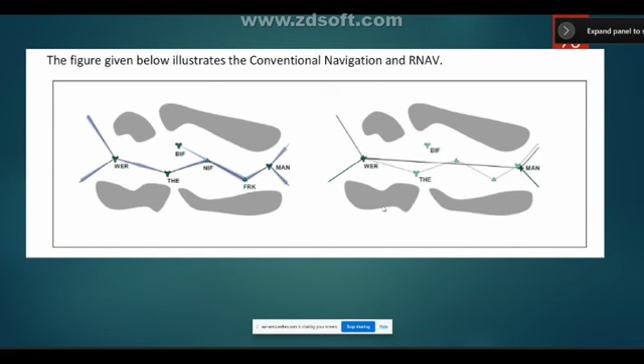So slowly you can find almost all our aircraft, mostly in en route airspace, will fly this way using RNAV, area navigation, instead of using ground based navigational equipment facilities, or global positioning system GPS, or in generic term GNSS, global navigation satellite system. This is the way in which it is defined.

Conventional routes, you can find the first left one, ground based, zigzagging, but ultimately you will find that has only limited flexibility. Whereas in RNAV routes, the routes are defined using waypoints. You can see this symbol represents waypoints. So it will fly from waypoint 1 to waypoint 2, waypoint 3, waypoint 4, and ultimately reach the destination.

At least for the participants, this slightly deviates from our technical subject, but having given this attachment, we should know slightly about other things also, like RNAV, RNP and all when we study navigation aids. So first it was having only limited flexibility, and migrating to RNAV increased efficiency, and it is highly optimized.

By this, again, what do we achieve? Again, as we said earlier, reduce the time, fuel saving, and carbon emission. Other than that, is anything there? Can anybody guess? The deviation from the desired path is reduced.

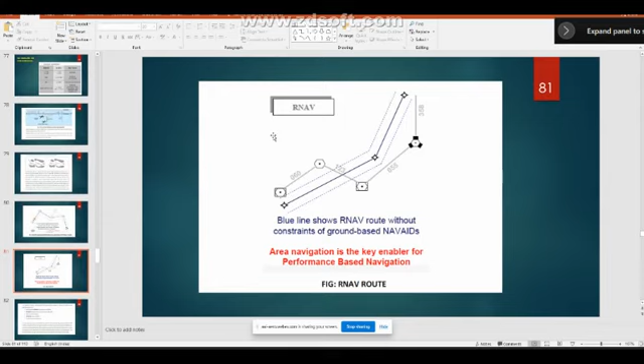Can anybody say? TSE - TSE is one term. This is called total system error. Total system error, okay.

Exactly right, you are absolutely right. The system error is going to be there. System error in DME - is there any system error? In VOR, is there any system error? In DME yes, sir. For DME, 370 meters, something plus or minus 1.25%. Yeah, that's why in Annex 10 we have studied the technical specification.

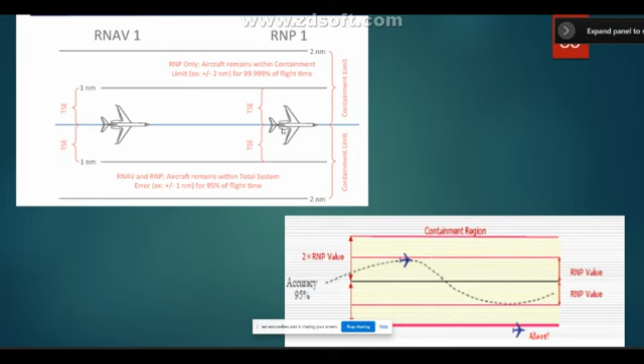All of this is available in the Performance Based Navigation Manual, Doc 9613. Anybody interested, you can go through it - clearly given in Doc 9613. Though we don't require it now, out of interest, in future it will be something like this, so naturally you have to learn, you can read. Are you getting me?

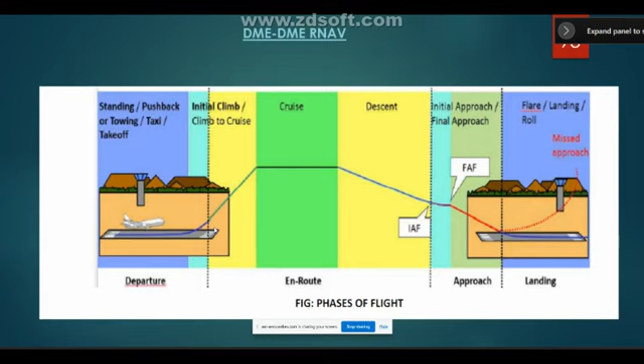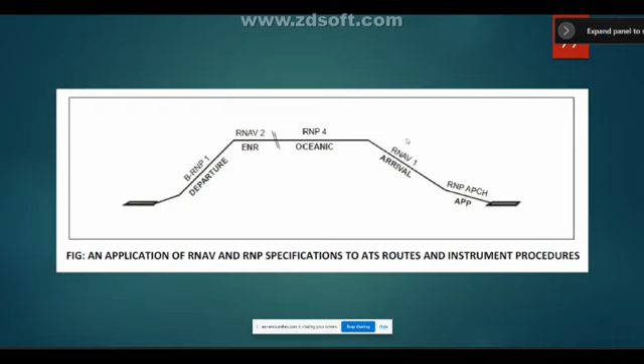So you can find this airspace consists of a lot of airways and a lot of waypoints. Based on that, any flight flies through the waypoint airspace from departure to arrival. Just for an example, RNAV5 - how is it defined? Accuracy plus or minus 5 miles for 95% of the flight time, that's how it is.

Integrity, anybody remember what is integrity? Sir, integrity means faithfulness, how much time it will give the same reading again and again. Integrity, the faithfulness, repeated performance. Added to that, faithful.

It doesn't stop with that integrity. Faithfulness, okay. If I miss faithfulness, what happens? If my equipment is not faithful enough, what happens? Sir, it should not provide misguiding information. That's what we have just read in VOR.

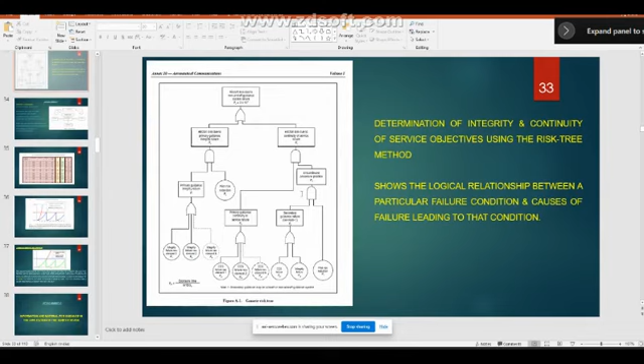During VOR we were going through all those things. No equipment should give misleading information. As far as normal operation is there, it's fine, good. My system giving false alarm, yes, good. But my system never should give misleading information. That is why integrity. If integrity is there, integrity risk also is going to be there.

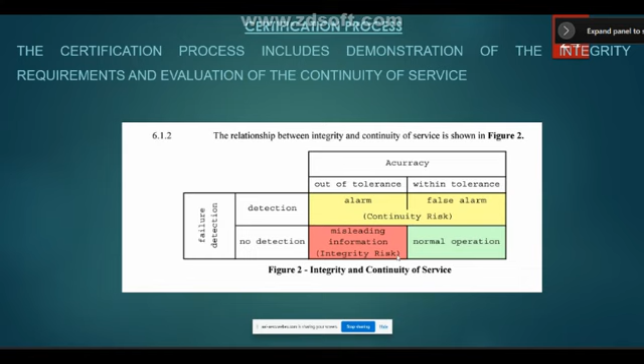That's why in our DVOR class we have seen integrity and continuity of service. No time misleading information should be given. Normal operation fine, alarm operation is fine, my system shuts down. But even after alarm my system is not shutting down means that is dangerous. That should never be allowed. That's what we were studying in VOR.

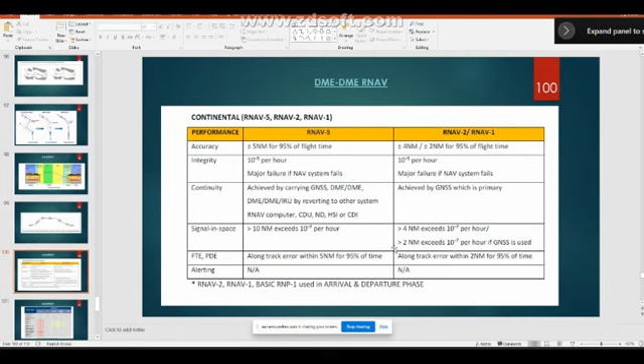Now integrity, this is what just we were seeing. So 10 to the power minus something, per hour only this much can be for RNAV 5. If RNAV 5 can be used, by which facility can it be provided? Either GNSS, Global Navigation Satellite System, or it can be given by DME and DME.

RNAV means there will be two DME facilities, not only a single DME facility for aircraft flying. If we speak of RNAV DME, two adjacent DME facilities will be used for flying. DME and IRU, IRU is Inertial Reference Unit. Suppose GNSS fails, airborne equipment can use DME. If DME also fails, it can use IRU, Inertial Reference Unit, which is within the aircraft itself. So with a lot of safety everything is designed.

GNSS is the primary source for providing navigation signal. Secondary is DME with IRU. But these are all the facilities, the RNAV computer is nothing but an FMS which is available on board.

These are all the devices given to the pilot. CDU is the control unit, navigation display. HSI and CDI you should be knowing. What is HSI or CDI? What is HSI?

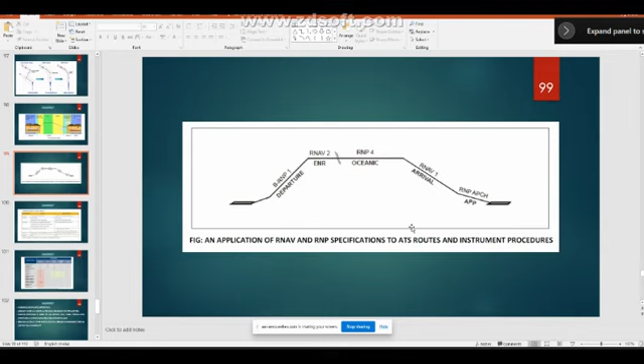Flight phases, do you remember this? From departure to landing, GNSS supports navigation. It provides navigation support, or it can be used as a navigation source.

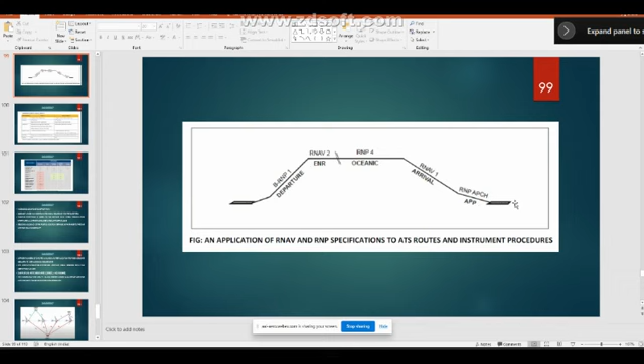It may be bit new, so you may not be able to get it fully, but still you can grasp it, because we know what is DME, what is VOR, what is GNSS, at least you can grasp it.

Now coming to this portion, DME to DME RNAV, increasing use of DME to support RNAV. Earlier in conventional navigation, aircraft used to fly in segments towards one VOR DME, next VOR DME, third VOR DME, like that it goes. But nowadays it doesn't fly like this, it takes a much shorter path.

So it uses DME and does not impose any additional technical requirement on the DME system. Simply by using RNAV, you need not upgrade your DME and all. Whatever DME infrastructure is there, that is more than sufficient to design RNAV routes.

Number 3, DME to DME positioning is based on the aircraft RNAV system that uses a triangulation method for position determination from multiple DME ranges. You see, multiple DME ranges.

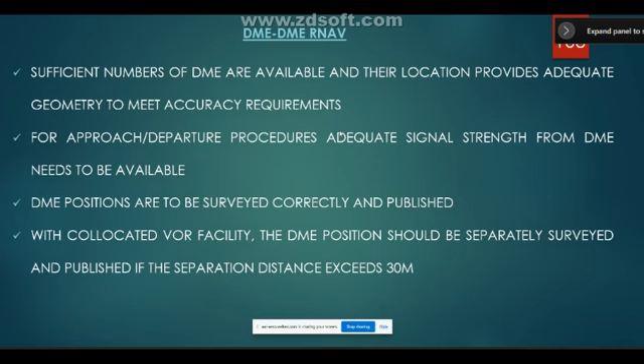With a co-located VOR facility, the DME position should be separately surveyed and published if the separation distance exceeds 30 meters. In some cases, and in most cases, it is co-located with DME and within 30 meters only, so the DME and VOR position will be the same. So these are all the points which are given in the attachment for DME, DME routes.

This is the way in which DME will be used. Both two DMEs will be used by any aircraft flying. Earlier, what we have seen, an aircraft will be flying this way, number 2, number 3, and it reaches destination. But nowadays it doesn't go like that, it goes in a straight path. It uses two DME, DME A and DME B.

So this is range A, range B. It finds the position, it flies at each and every point. It checks, FMS checks, and when it flies, it takes from this DME. When it moves apart, no more this DME will be used, this DME is being used along with this DME. Likewise, an aircraft flies through different waypoints using DME infrastructure, DME A, DME B, and DME C.

So that is called DME-DME RNAV. This is RNAV route, it can be RNAV 5, RNAV 2, RNAV 1, depending upon the airspace. And as we earlier seen, the accuracy of this is a must. DME equipment is a must. It's not only for DME, for VOR, localizer, ILS, whatever it may be, accuracy is to be maintained.

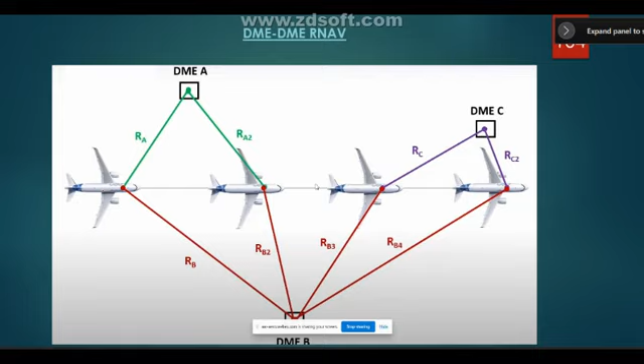How does DME function? Onboard FMS is fed with input from multiple sensors and calculates a navigation solution. Navigation solution is nothing but position determination, calculated by the flight management system, in fact the flight management computer. And accuracy depends on the geometry of the DME with respect to the aircraft, the signal in space, because signal in space can suffer from multipath errors, terrain effects, obstructions, bushes, whatever it may be. So that is not in our control, and accuracy depends upon all these factors.

So in this example, two DMEs are there, DME A and DME B. Here you can see two bands. This is the true line location from DME A, a measured line. This is the true line of the DME, from this DME an aircraft is flying this way. That is the true line, but as measured by the airborne interrogator system, it tells something like this. So what is this? This is nothing but the error, due to measurement, or due to the ground based facility, or due to the airborne equipment, whatever it may be, anything can be taken into account.

This error, likewise from DME B, you can see this is the error, the uncertainty area. Based on that, signals from DME A and DME B are received and fed to the FMS. FMS will find a solution and give the position. This is what happens in the DME-DME RNAV principle. Two DMEs will be used, the uncertain area will be measured, and position information will be given to the pilot. Pilot will know whether the airborne system is functioning properly or not.

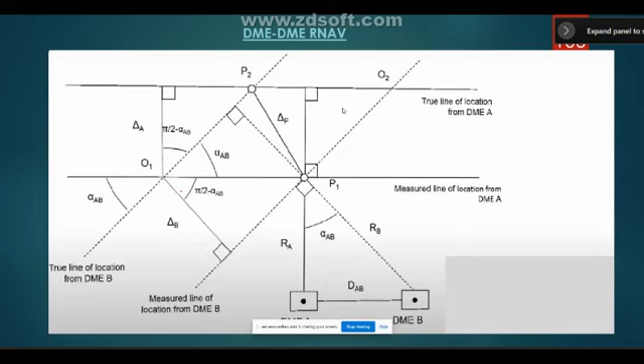And when using DME-DME, this is called the area of DME-DME positioning. Whatever area is in green color, that can be used when two DMEs are used. This portion, the central portion, and this portion, no DME, those DME cannot be used because accuracy is lost. So accuracy in this zone is fine, in this zone is fine, but here accuracy is lost. That's what this tells us. When DME-DME, both two DMEs are used in RNAV, an aircraft flying in this zone, definitely accuracy is maintained.

So what is that called? Error of DME-DME positioning means the angle between the aircraft and the two DMEs. It should be between 30 and 150 degrees. This is called the angle subtended by the aircraft from the DME. It should be greater than 30 degrees and less than 150 degrees. That is nothing but the angle of constant lines, constant line zone. If the aircraft is within this, yes, a DME can be perfectly used.

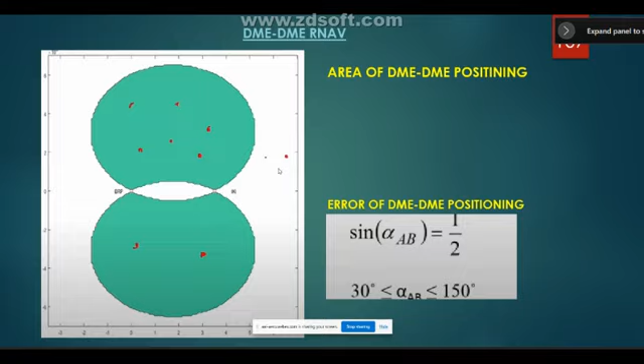If accuracy is maintained, fine. If accuracy is lost, what has to be done? It should be alerted. That alert will be something like this, in the flight deck.

These are all instruments in the flight deck. This is the primary flight instrument. This is the navigation display. You can see here one display is there.

Required navigation performance to fly in this airspace is RNP2 airspace, but ANP is actual navigation performance. That is the measurement done by the FMS. It can be taken care of by measurement made by two DMEs, or two from GNSS, or VOR-DME, or IRS, whatever it may be. So it tells that actual navigation performance is 0.05 miles, whereas the airspace or RNP route is 2 miles. It is well within this.

So that's why this is the indication to the pilot: yes, my system is functioning normal, I can comfortably fly in this route. So if it is going to be an RNP5 route, whatever ANP measurement is done, it goes like that. So in the navigation display, an alert will be there. This will be used by the pilot.

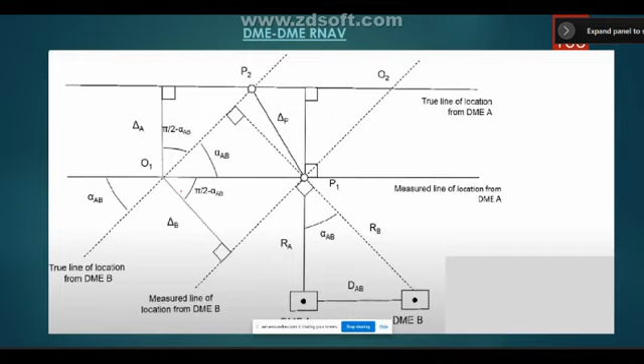Okay, this is what DME positioning is done. Anything you want to ask, it can be anything here. Silly questions also, no problem at all. Anybody, anything, please, you sir, can.

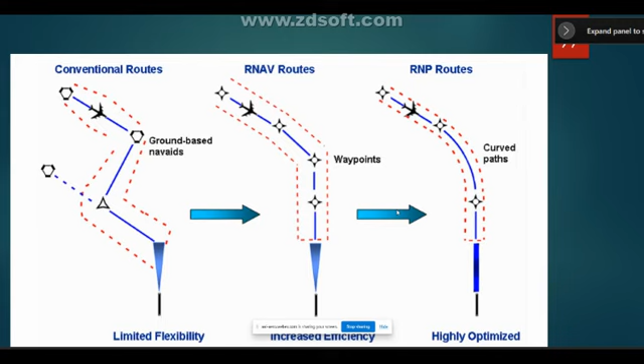That alpha AB is the angle between aircraft and DME. One minute, I don't have exactly the angle between alpha AB you have shown in the slide, between 30 and 150. Okay, okay. Can I just refer to one more thing? I will tell you, can you wait for 5 minutes? Okay sir, no problem, anything, any other questions you can put, no problem at all.

Any other? Yes, people are silent. Please sir, you can.

Sir, in RNAV routes which we are seeing here, they are direct straight paths, being followed for the waypoints connecting one waypoint to another. Correct, correct, correct. How sir, is RNP providing a curved path, sir?

That is there again, there are some ATS procedures: fly-by waypoint, fly-over waypoint, lot many things are there. Based on that only, it is designed.

Okay, so what happens sir, is when an aircraft flies towards a VOR, it will fly over the VOR, then take a turn like that, it goes, then it meets the airway. In RNP, it need not fly over, it can take a curved path, it can just meet the next airway.

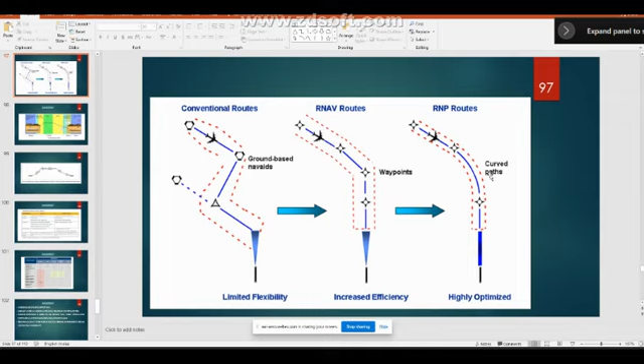Sir, actually this is a very new topic for many of the candidates. Okay, that's fine, that's what I told you. For that reason only sir, I requested you to kindly guide us on this topic, correct. This is new, everybody can be benefited, this is new only, that's why people may find it difficult. But still, now it is the time for others to just learn this subject also. It's not that I'll be sticking only to the technical thing, the DME only, some VOR or ILS, nothing like that. Your generation, slowly, I think you should learn other things also, right?

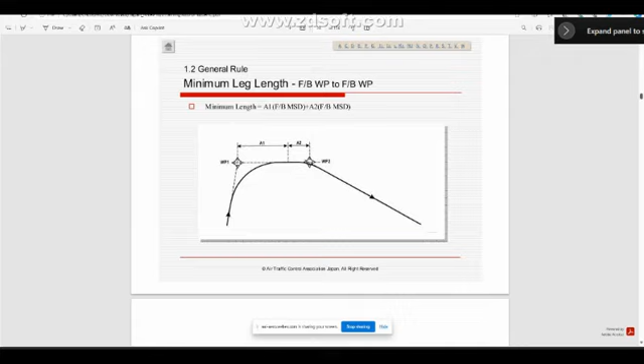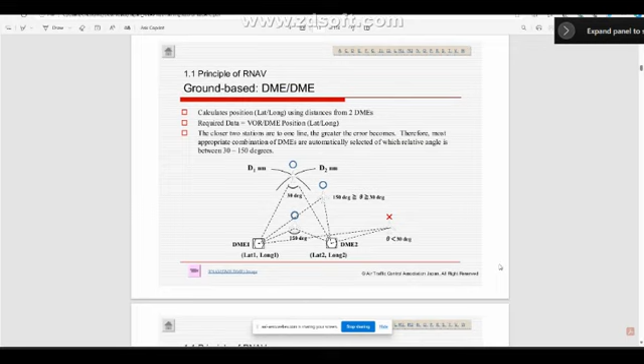Lot many things are there here. Just I will try to show. Okay, this is the one. You see, ground-based DME, how it finds and calculates position, lat long, using distance from 2 DME. It can be lat long or Cartesian coordinates, whatever it may be. That depends. Required data is DME position.

The closer the two stations are to one line, the greater the error becomes. Therefore, the most appropriate combination of DMEs is automatically selected, of which the relative angle is between 30 and 150 degrees. When it goes less than 30 degrees, DME1 and DME2 cannot be used together. With DME2, some other DME3 has to be used, or with DME1, DME4 has to be used.

This is the way in which this angle is defined. This angle is subtended by the aircraft between these DMEs. It will be between 30 and 150 degrees only. This will be automatically taken care of by the FMS. FMS will be automatically tuning to the nearby DMEs.

That is why in the navigation database it should be updated. Navigation database will be updated periodically in a 28-day cycle. Perhaps half the people may be knowing what is the 28-day cycle. Anybody? 28-day cycle?

Okay, in the 28-day cycle, anything that has to be published will be published accordingly. That will be put in the database, on each and every onboard aircraft. That is why it is very much critical that the navigation database is maintained properly.

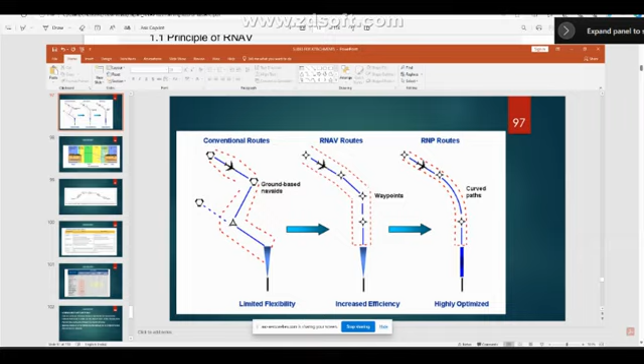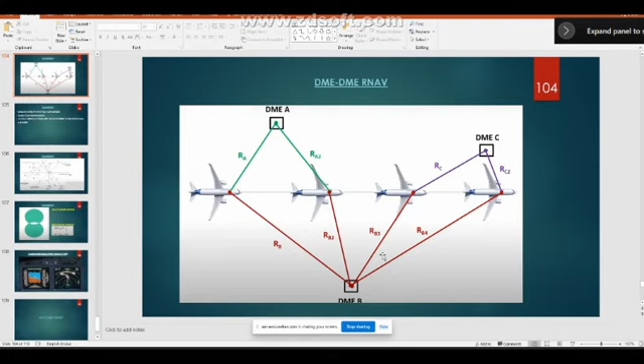This is the one. The pilot can know what is his required navigation performance, what is my onboard equipment's navigation solution. Yes, he knows, he's getting alerted. If it deviates or if accuracy is lost, then he has to accordingly use a different set, a secondary source, it can be DME. That's what we have seen, where it can fly. If GNSS is lost, the next alternate source is only DME or DME with IRU.

IRU is not used alone. VOR/DME is not used. So that is why you will find the primary source of navigation is GNSS, or it can fly with DME. This is the basis in which an aircraft flies between A and B using RNAV or RNP routes, whatever it may be, using ground infrastructure or GNSS, anything. This is the way in which an aircraft flies between A and B.

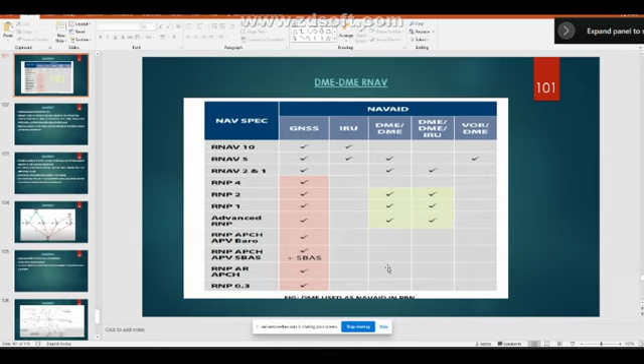So our job is to see whether our systems are being maintained to specifications, using our usual maintenance schedules - accurate enough, signal strength, everything we measure. Any question further? If you want, otherwise, Pankaj?

Yes, sir, anything? This 30 and 150 degrees, are you able to get it now? Yes, sir. Have you seen it, or should I show you again? You are, that's only, fine sir.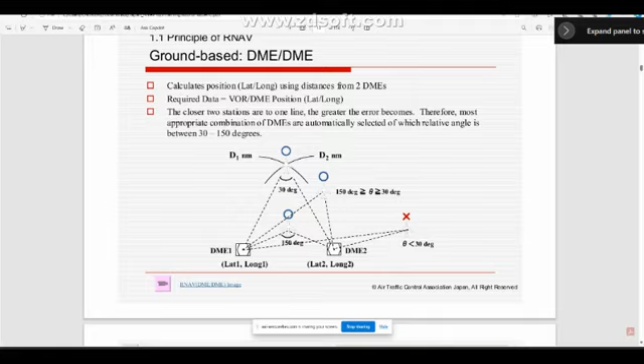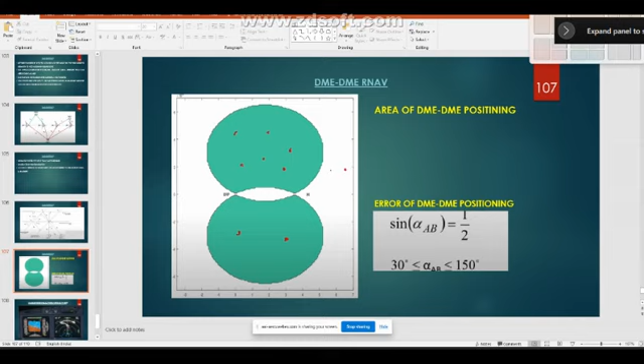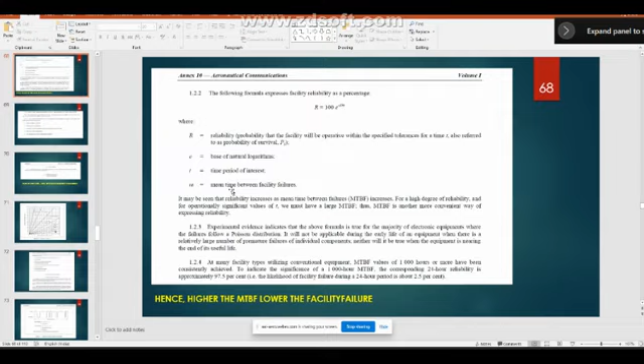Sir, can we close that? Some light on, which one? Yes sir, this desired to undesired signal ratio also, sir. Desired to undesired - I think I covered that somewhere in the VOR class, if I am right. I don't remember. Yes sir, you have taken it, sir. I don't remember where I have taken it.

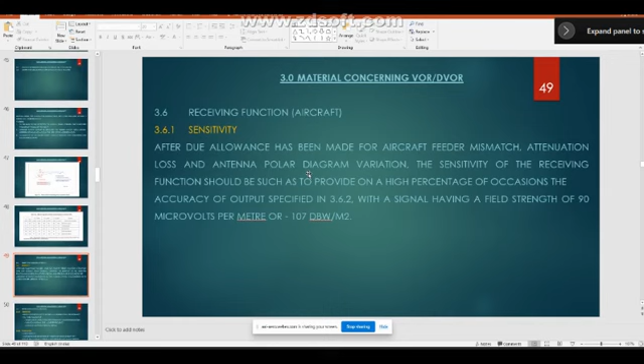I think it was during DVOR class only, sir. This desired to undesired ratio - whether it is for DVOR or DME, it is all the same.

First of all, one should know for any facility, DOC, designated operational coverage, is a must. One should know whether it is a terminal VOR, en route VOR, or co-located DME. That designated operational coverage - one should know for what purpose the DME is used, whether it is used as an en route DME or only a terminal DME, that matters. If it is going to be with a glide path, naturally that is only for landing purpose. If it is going to be a VOR, it can be used for en route. So DOC, designated operational coverage.

If it is going to be, then two terms come in - designated operational range and designated operational altitude or height. This is a must. This is the example for VOR. Same applies for DME also, only the band is different, right?

Anything else matters for VOR DME? Anything else matters? Frequency matters. If frequency matters means other effects are there, na? Terrain effects may be there. Yes, one is UHF band, another is VHF band. But whatsoever, multipath effect will creep in if it is going to be DME.

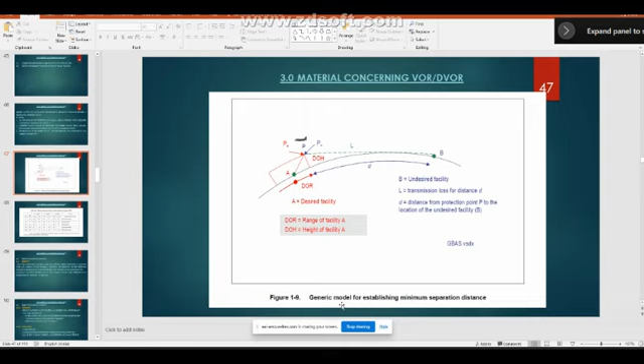So that is a generic model for establishing minimum separation distance. If I am right, this is what is given in the reference material. You see here, it is given in this ratio. What it says is ratio.

This is for delta of 150 kilohertz. If it is going to be for DME, you can see what should be the ratio. My transmitter is going to generate 17 or 20 or 30 dB, so what will be my ratio? That needs to be checked. Rather, it is checked, and based on that only the adjacent channels are defined, frequencies are defined, and the power also is defined, whether it is terminal VOR or en route VOR, that way it is defined.

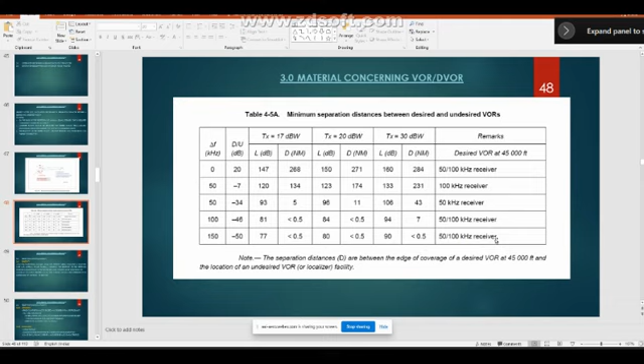Anything else? I think Pankaj, if I am right, this is about the D/U ratio, desired to undesired signal ratio. That is just to avoid the interference from the adjacent channel. Correct, yes. Anything else? Thank you, sir.

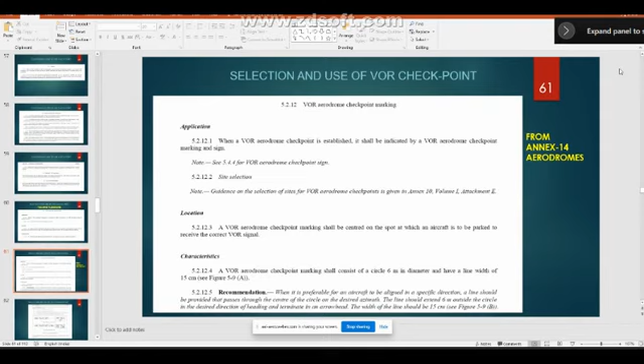Anyone, please, if you have any query, kindly take this opportunity to ask your doubts and clear it right now.

So next to that, it is only DME, after that only VOR. That is why primary source of navigation will be GNSS followed by DME. So in RNAV, they use GNSS first, followed by DME.

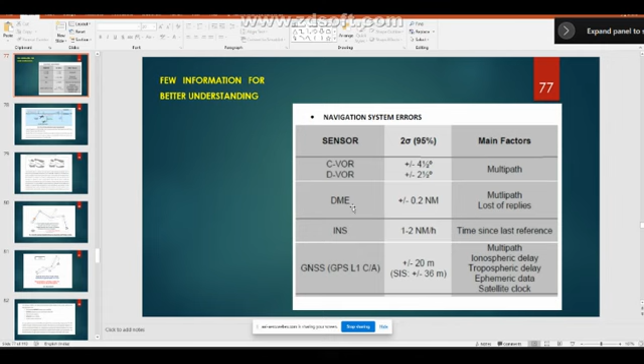So basically that depends upon the TSE, total system error, which has navigation system error also inside it. This is the total system error. Flight technical error and path error are very minimal, but foremost you will find only navigation system error and total system error. Based on that only RNAV, RNP airspaces are defined, added with the ground-based infrastructure or GNSS.

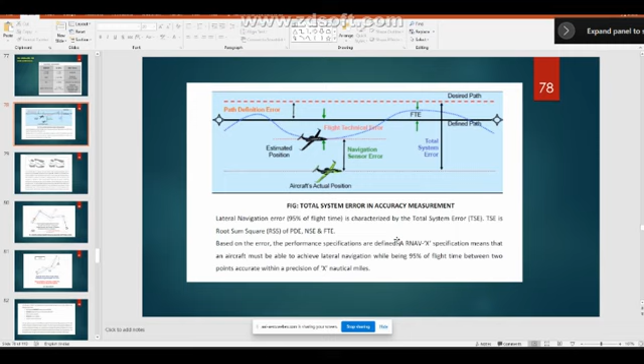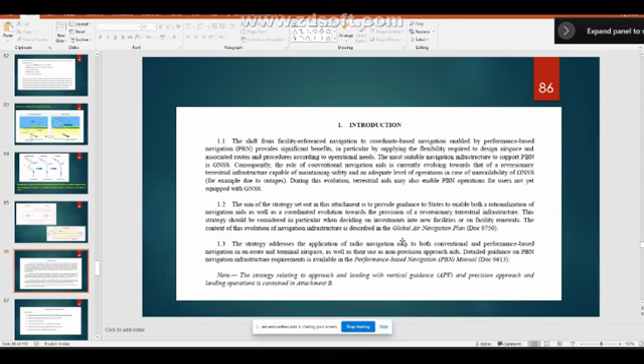Anything? I think this is a very brief session. This should be more than sufficient. Participants who are keen in learning, they can just refer. Lot of manuals are there, lot of materials are there available, please you can go through.

Participants, is it okay for you? Just I want some reply here. It's not that simply you are sitting and I am talking, or instructors are talking. You should slightly tell whether how was it. Are you able to get it? Are people there, or everybody vanished?

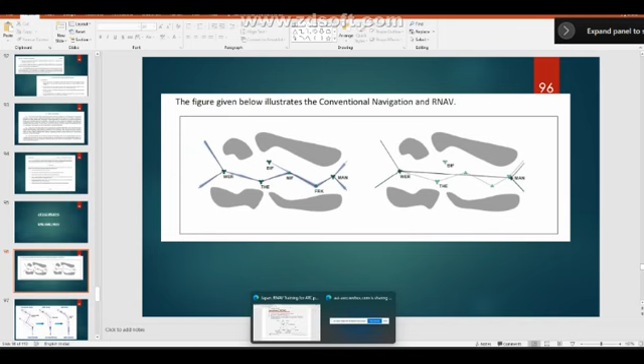Yes, Pankaj. They are there, sir. Okay, very fruitful session, sir. Still, I hope that everybody must have got a deep understanding in at least whatever is there in our systems. They at least got the points now, and they can refer it for further study, sir. Yeah, definitely they can refer, lot of manuals are there. Lot of manuals are there. It's my sincere...